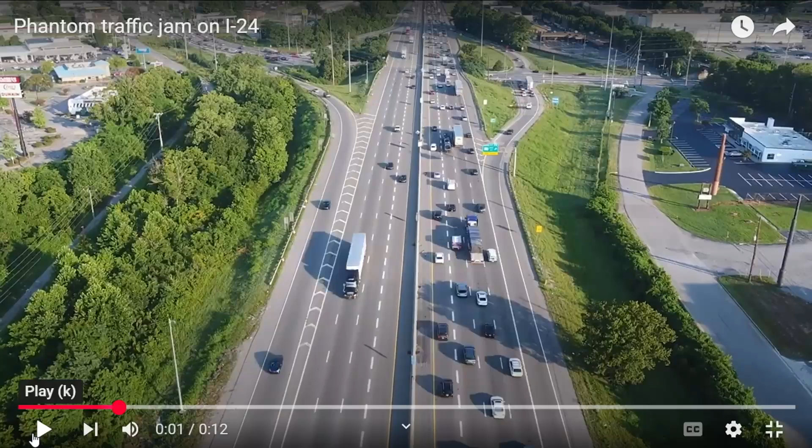It's a 1, 2, 3, 4 lane expressway or motorway. That's an off ramp. The traffic goes out from there. That's an on ramp. The traffic enters from there on the motorway section, right? And this is from YouTube, the I-24 expressway in the US. But it's a very good one to actually show you the congestion on the motorway section. So for example, if I look here, what observations can you see?

See, the traffic is getting congested, and the bottleneck, as you are saying, whenever there is merging happening at the on ramp, the bottleneck is there, and see the density variations. What else can you see from here? Imagine you are one of the drivers somewhere there. Maybe the speed limit is 100 kilometers per hour. You're driving at a speed of 100, and you're slightly distracted. You might be changing the music, or you're talking to your kid or whatever, right? You're distracted. You're driving at 100.

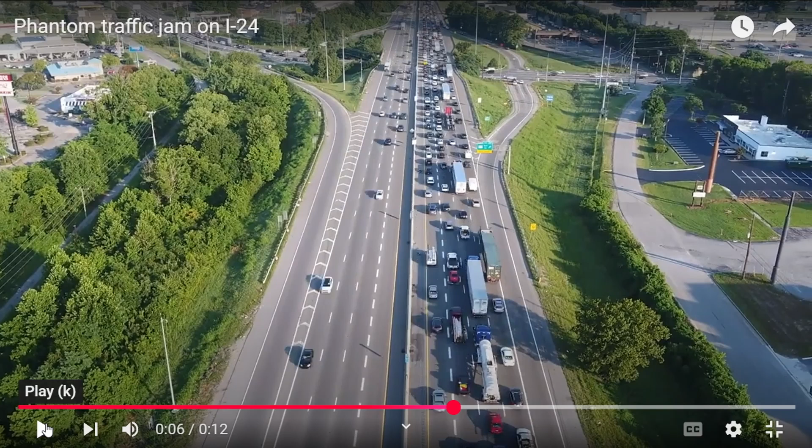What can happen if you're not fully attentive? You can easily have a rear end collision. One collision can lead to multiple collisions, right? It's unforgivable when you're driving at a very high speed. In 1 second, you can travel maybe 10-20 meters. You think 1 second is just 1 second, but you can travel very far. That can lead to an accident easily.

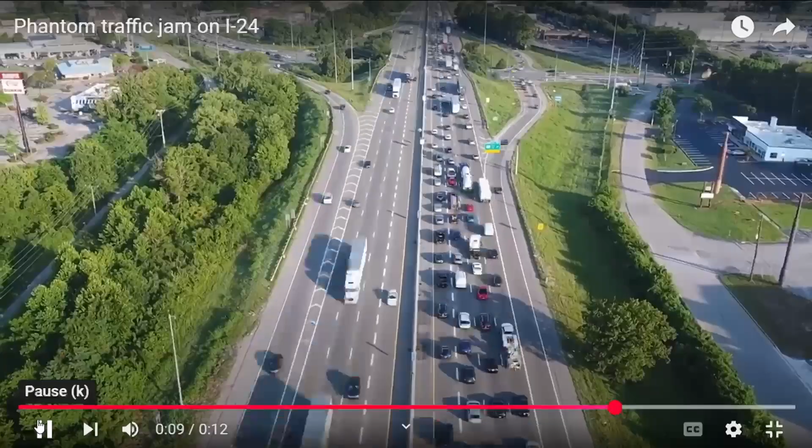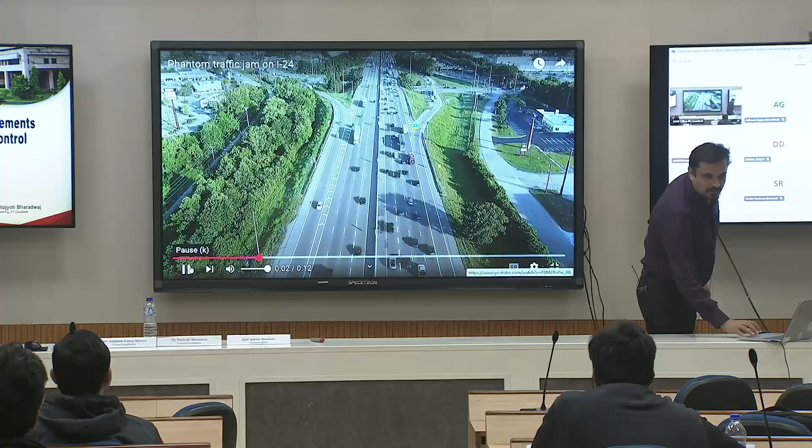So whenever you are having this kind of congestion happening, in this case there is a total stop and go condition, but even before the stop and go condition, when the traffic is getting congested, maybe now the traffic speed is 80 or 60, you are highly likely to have speed variations happening.

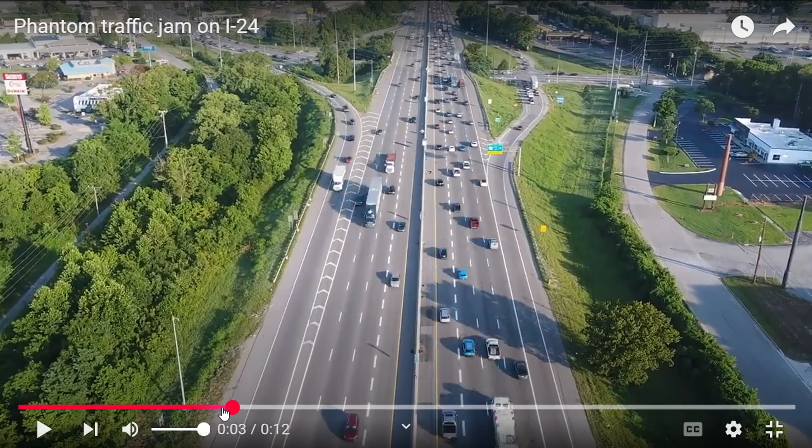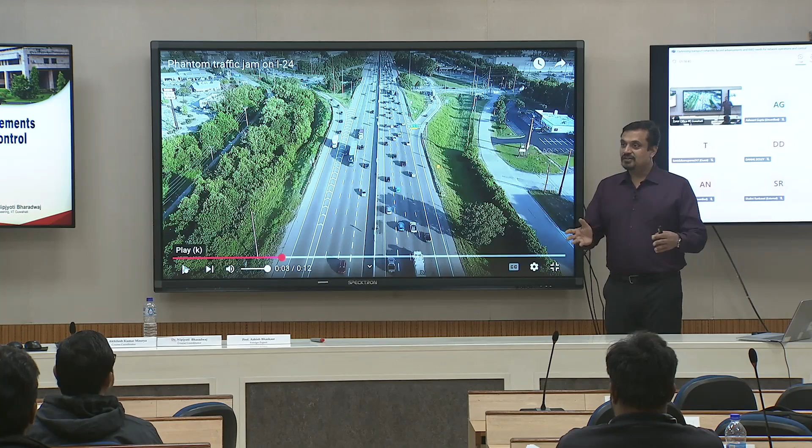Another thing that you can also notice from this kind of video is to check different lanes, how traffic in different lanes is moving. Some lanes are still fast compared to the other lanes, right? There is a lane by lane variation also happening. When you are trying to control the motorway sections, the expressway sections, you have to think about the ways or strategies by which you can minimize the risk of incidents on the network, and that's why you want to come up with some control.

You have 1, 2, 3, 4 lanes here, so they are almost twice a 2-lane arterial in terms of lane size, but arterials carry less traffic. These are carrying a much higher traffic volume. So there is actually a very high amount of demand flowing on it. So you have to basically give it some priority to let it flow properly, because if anything happens, you are stuck there. You can be stuck there for hours.

Imagine an incident happening here, and the next off ramp is maybe 2 kilometers away, and you are stuck at this point. There's no way you can take an off ramp. You are stuck on the motorway section. You cannot move out, and you might be stuck for hours. So you have to look at the ways by which you can really make it more efficient.

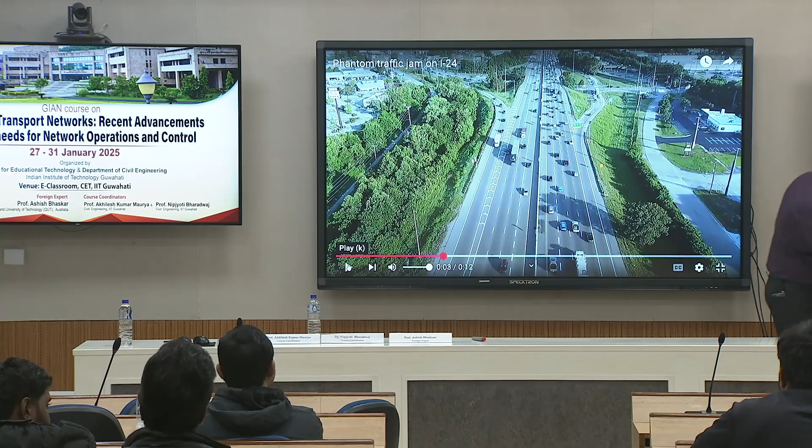So motorways carry a large volume of traffic, which you have already seen, right? The queues there can be really very long. A number of people will be impacted. It has its own environmental and economic impact. The speed differential, as we have already seen, is very high. You can have certain lanes with a high speed compared to the other lanes, which has a significant potential for severe accidents on the network.

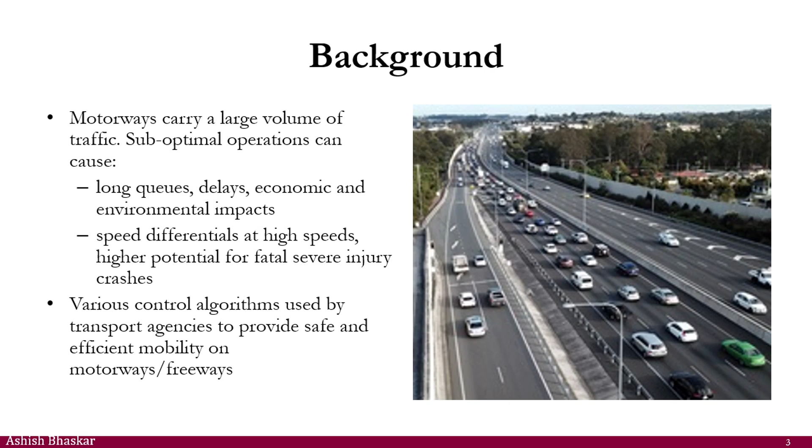Now there are various control algorithms developed by agencies to control the motorways, and one of the algorithms is ramp metering, meaning when you are entering the motorway from the on ramp, you can meter the vehicles. Don't let them just enter blindly. Just hold and go, hold and go.

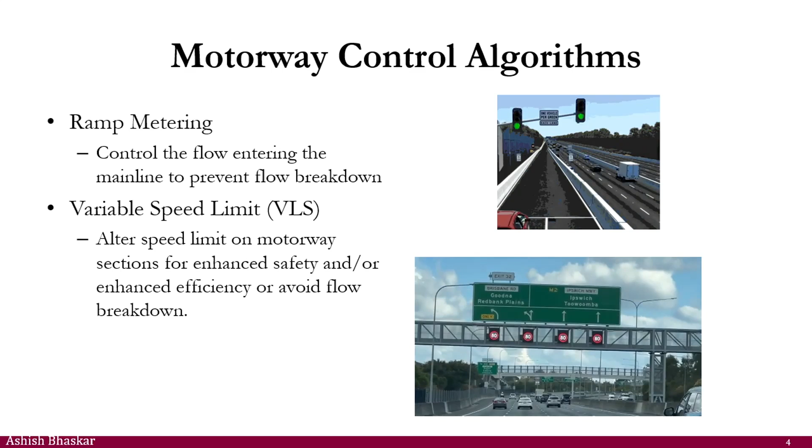That's one strategy that they can implement, or that's one actuator that they have in their hand by which they can control the movement on the motorway. Second one is the variable speed limit. You can change the speed limit of the section based on your requirement. So you alter the speed limit on motorway sections for enhanced safety and/or to enhance efficiency, but safety is the topmost priority here. These are the two ways by which you can control, and we are going to discuss these two ways.

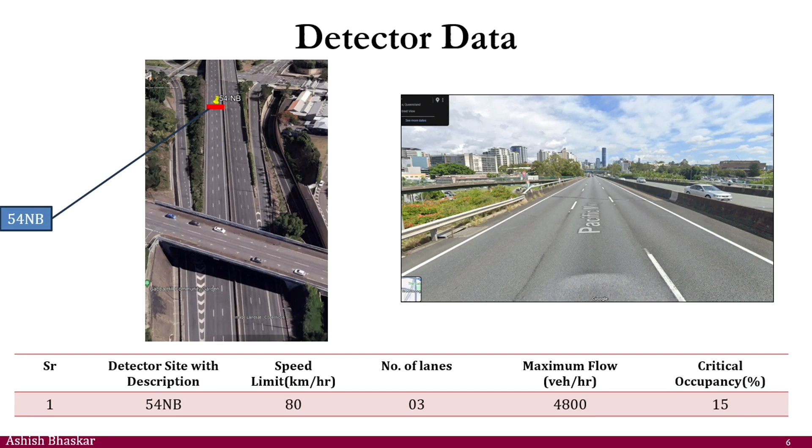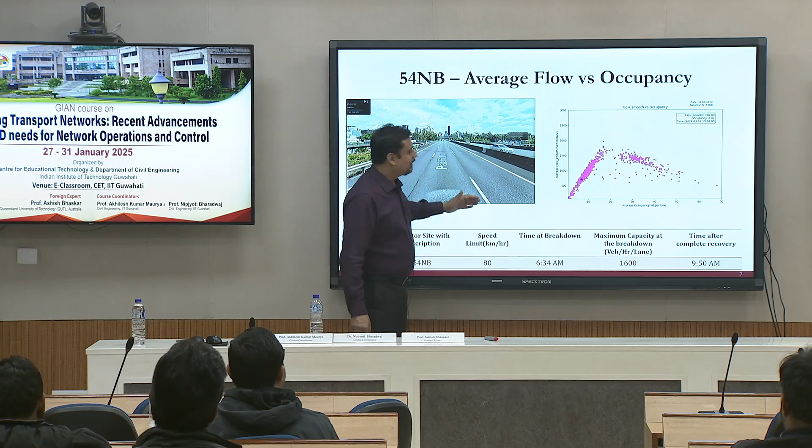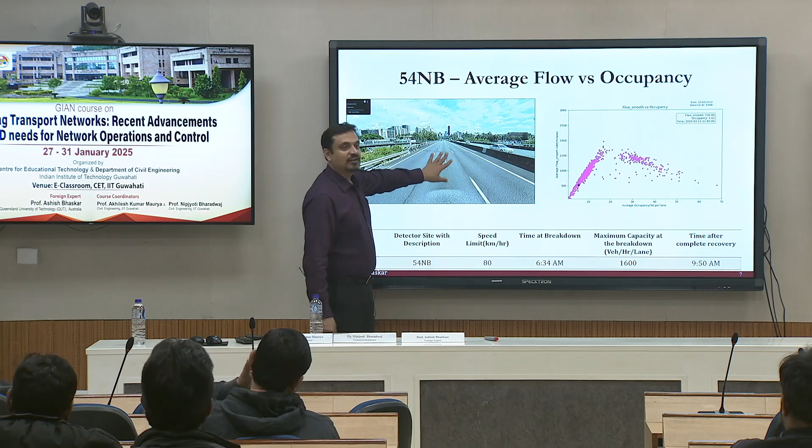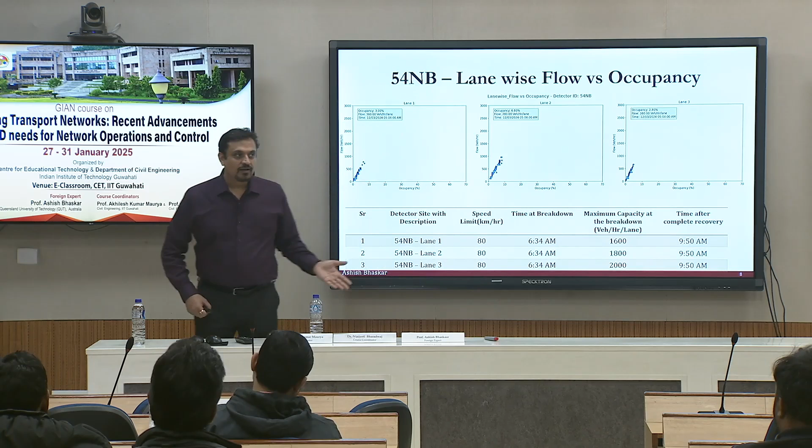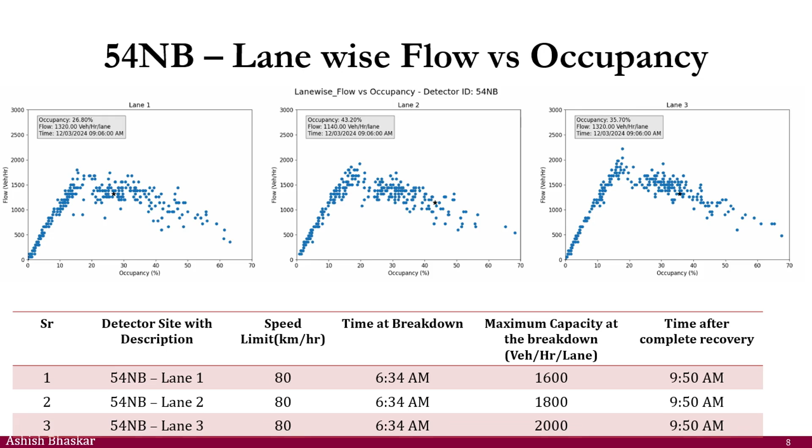I will come back to the hysteresis, but this is when you take an average. We have also seen individual lanes, lane 1, lane 2, lane 3. Australia has left-hand driving, same like India, not like the US where they have right-hand driving. So your lane 1 is the leftmost lane, this is the rightmost lane, and you can see the kind of plot you're observing. We have discussed that different lanes have slightly different capacity, in this particular case slightly different shape. And all of them have some level of hysteresis happening. So this is right now 9 a.m. in the morning and you are playing in this region.

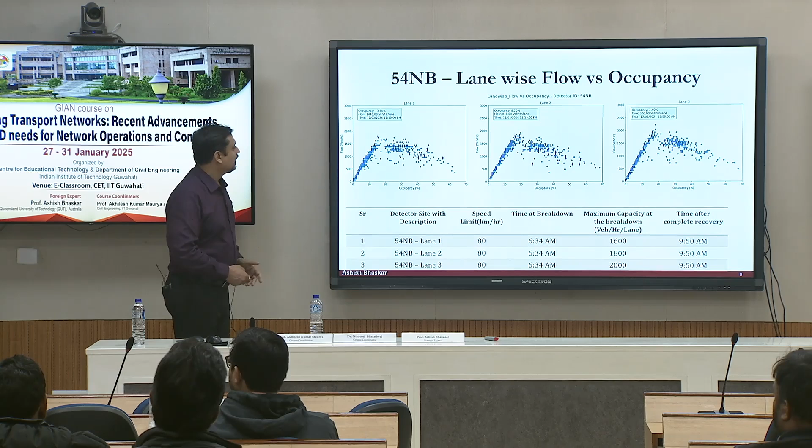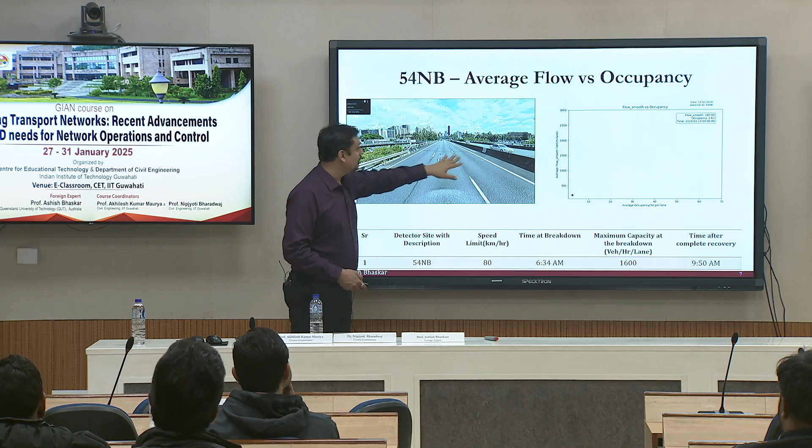Yeah? Sorry? Cut in the first lane, or that might be an off-ramp going perhaps somewhere. What do you mean by cut? Cut in the image you talked about previously? No, there's nothing on the first lane here. So all 3 lanes are like this. It can happen that there's an off-ramp, but in this particular section there's no off-ramp. It is just a section with 3 lanes, and you observe whatever we have shown here.

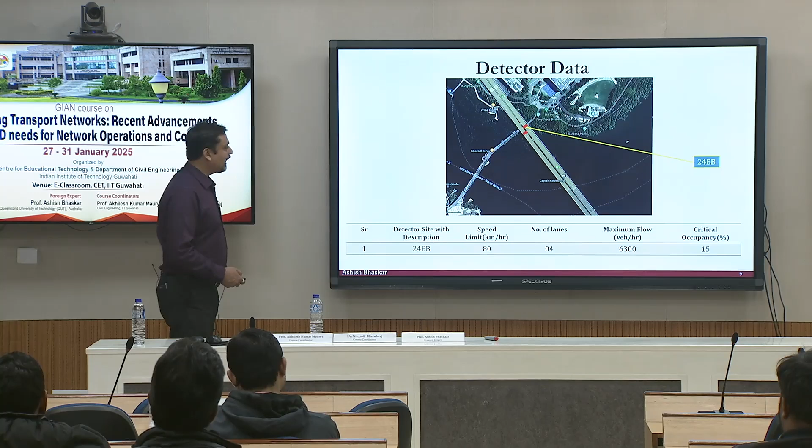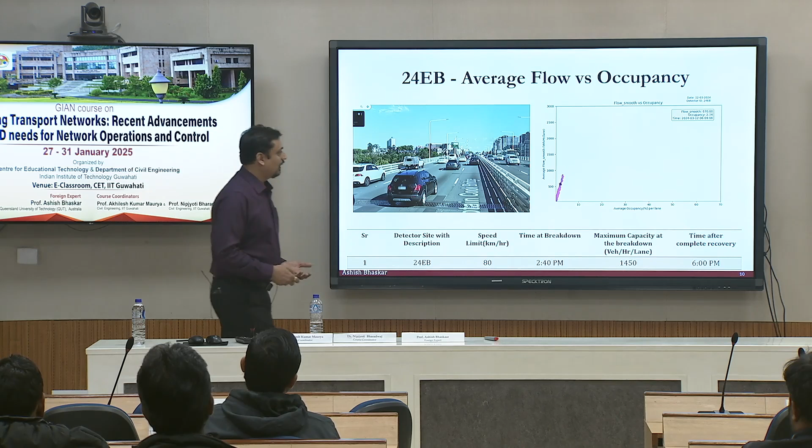Another section is on the bridge. We have 4 lanes: 1, 2, 3, 4. But the leftmost lane will exit the bridge, whereas the other ones won't. And this is the average that you get. So if you're driving on this portion of the bridge on the leftmost lane, you have to exit at the end of the bridge, so you will have slightly different behavior there. I will quickly speed forward this just for you to see how the shape looks.

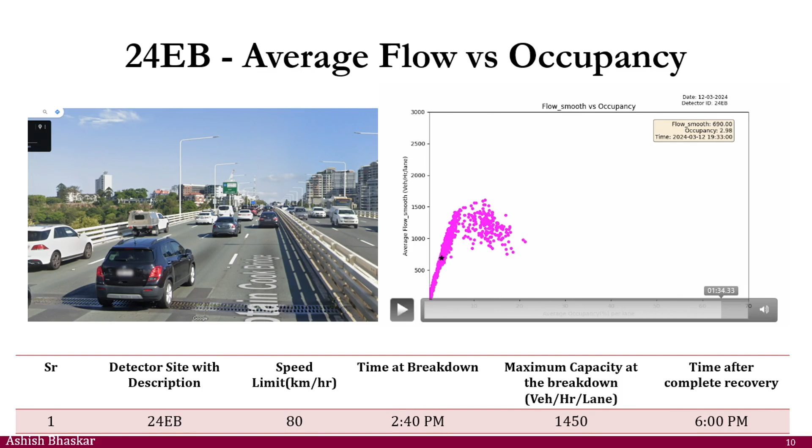So that's how the spread is happening on this one. Yeah, and if you look at the individual lanes, lane 1, lane 2, lane 3, lane 4, this one you can see is still in the lower one because most of the traffic is basically on that one. Unfortunately, lane 3 data was not available on that day. So as you can see, data are not always perfect. So you will have errors. If you try to generate the cumulative plot, you're not counting anything from that one.

And this is for one of the days, 12th of March 2024, quite a recent plot. And you can see the shape happening, right? So shapes will be different and different sections will be behaving differently. So in this particular case, I would say this is the worst lane compared to that one. So there is one lane which is behaving worse than the other one. And average performance will consider all the lanes.

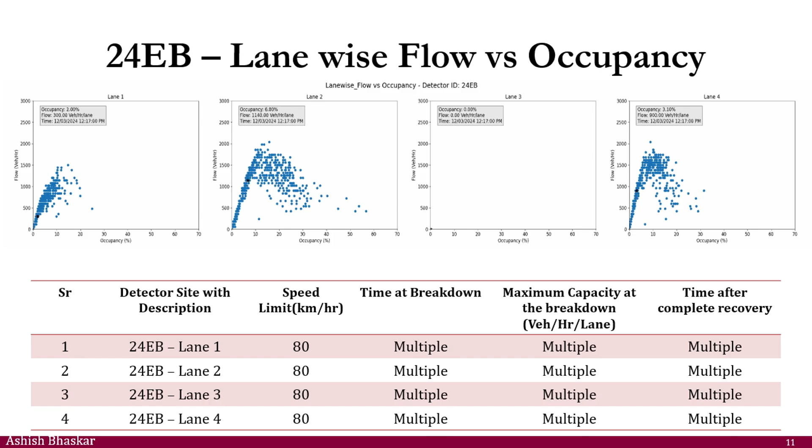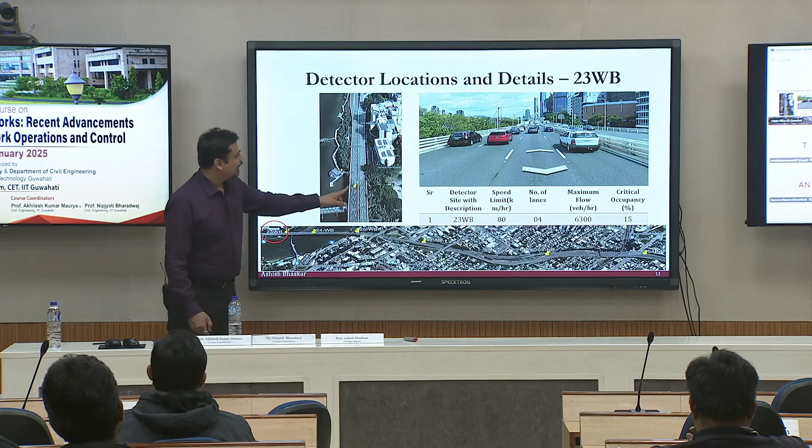Another section, we are now looking at 23. So now we are looking at a long stretch like this. So this is 23 westbound. Again, this is 4 lanes and it's still on the bridge. It is just going in the other direction of the motorway. This is, let's say, 25 westbound, further upstream. Then this is 54. So you have an off ramp just before that. So your loops are here, but before that there was an off ramp. You can see that that traffic has left.

And then if you go further up, in this particular case, you have no on ramp and off ramp, but you have a curvature. You can see the road is curving, and then again this one is having a curvature, and there is an off ramp. Or not, it's not an off ramp. This is basically an extra road going into the tunnel. So that's a toll road going along that.

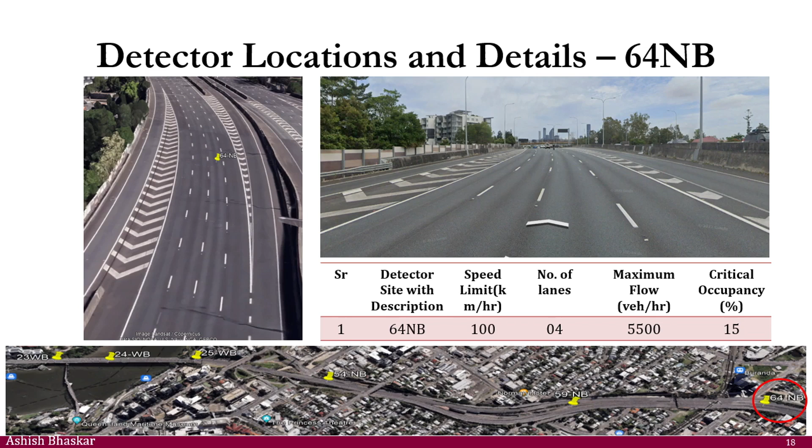But again, you have these 4 lanes, and this diagram is just presenting them in order. So the first one I think is 23, 24, and so on. So you can see 23, 24, 25. Oh, sorry, whatever the numbers were. So you can see the order. Downstream is here, upstream is there. So we are trying to present everything in one snapshot for you to see how the progression happens.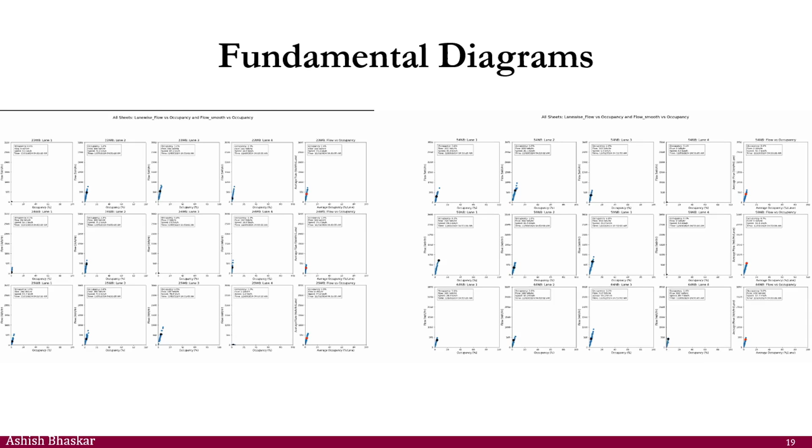So you can see that this loop was not working. Right now, none of them are congested. It's early in the morning sometime. This one is actually getting congested. And then the congestion spreads very quickly to upstream. So now you can see all the sections or all the locations in just one snapshot. So what inferences can you make from here? Like if maybe I bring it.

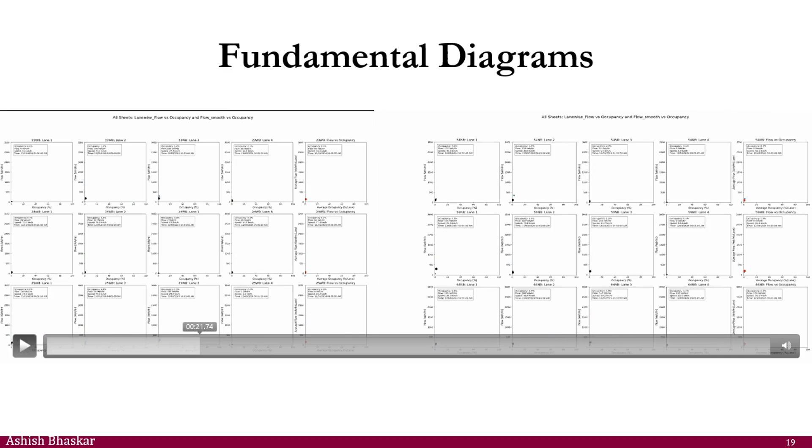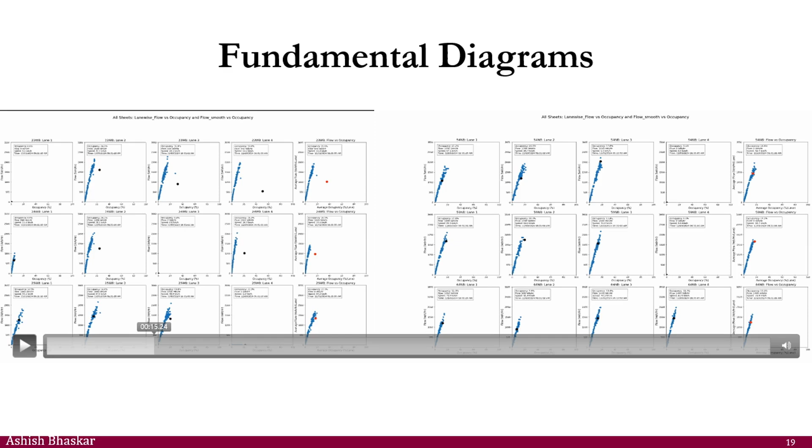How do I bring it? So at this time, there's no congestion. If I just keep on increasing, so you can see this one is now congested, going down. Others are not congested at this stage. Unfortunately, it's hard to see the time. What time? This is around 6 a.m. in the morning.

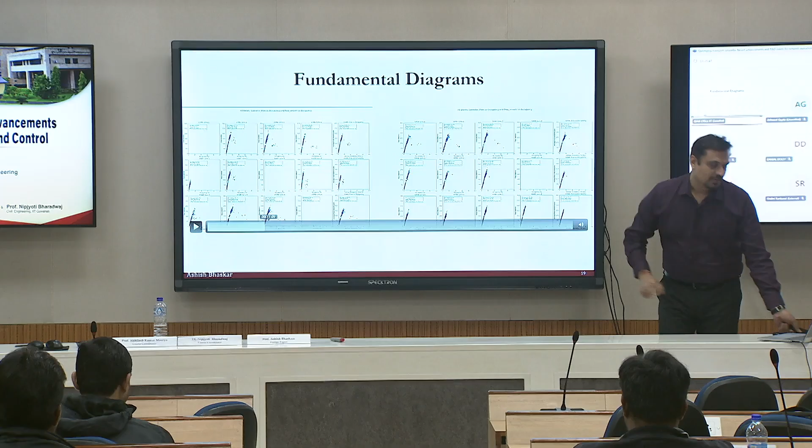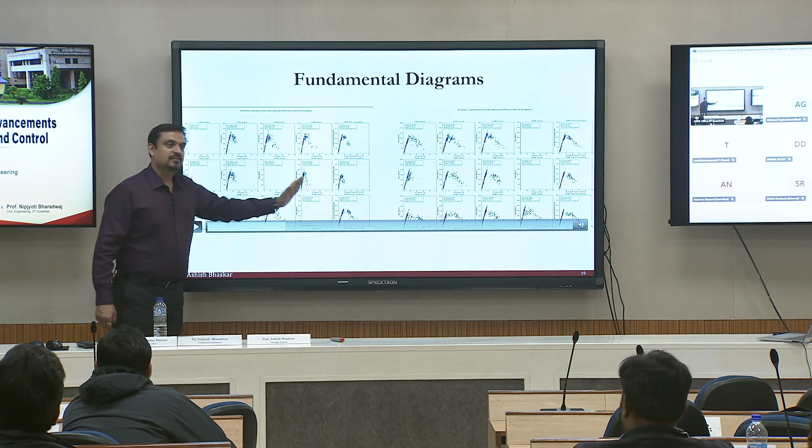So you can see there is more congestion happening here, but this one is still not congested. And then the congestion keeps on spreading up, and now all of them are congested. Whereas you can see, you might have some missing data, and you will have one of the worst lanes among the other ones, right? So based on this, if you have to make some decision, you will say, okay, I can focus on a decision based on the average among all the lanes, or I can focus my decision based on the worst among all the lanes. And generally, if you are taking a decision for the variable speed, you will go for the worst one, not the average one.

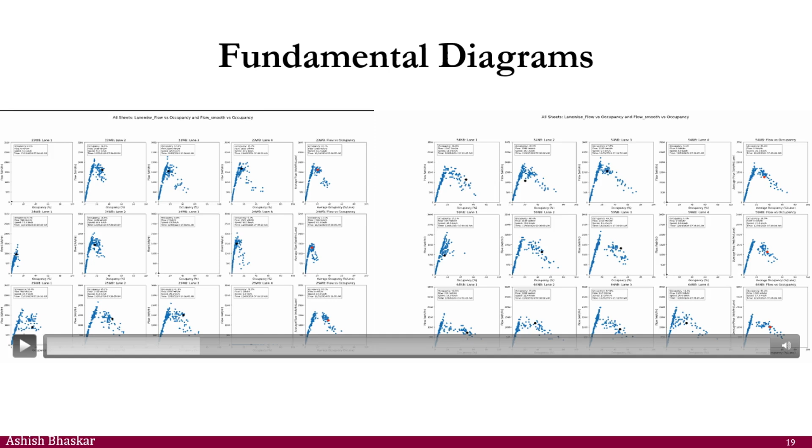With the worst, once the queue is formed on one, it will easily spread to other ones. But if the queue is formed, the speed variations are there, differentials are there, you have to take an action. So these real data sets give you enough data points in real time so that you can make some decisions in real time without having too much human intervention.

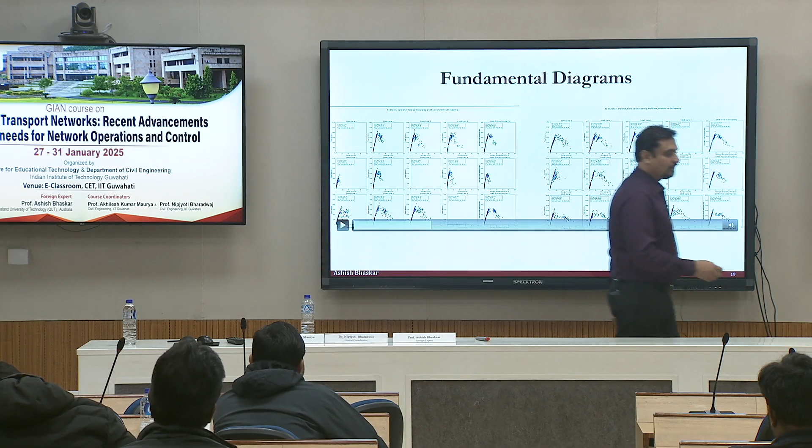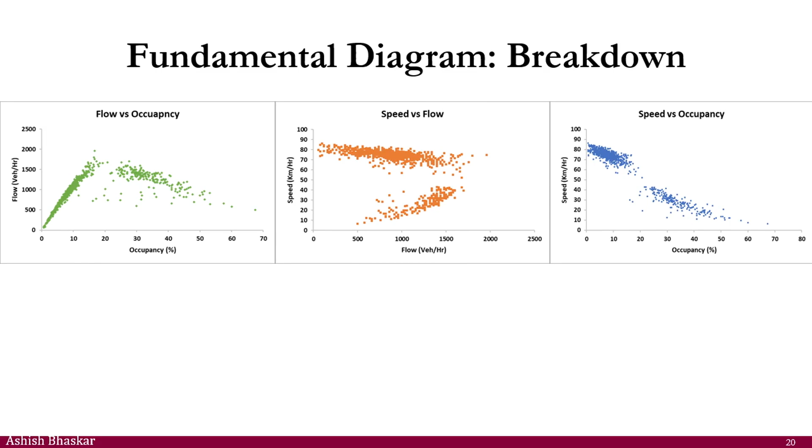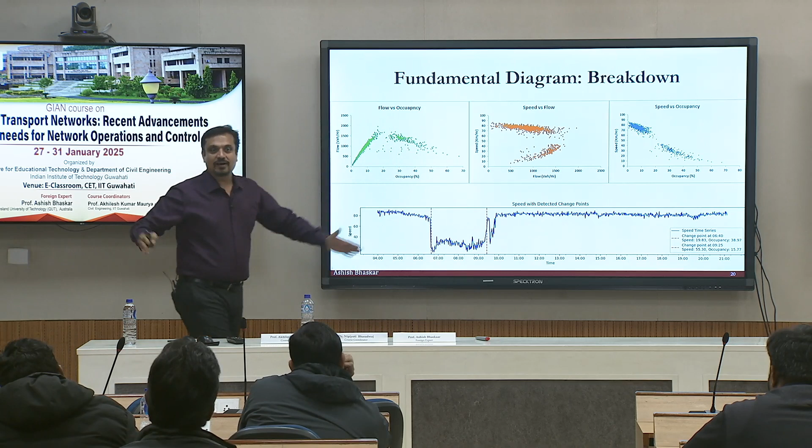There is a sudden drop in the speed happening, right? That's what we call a breakdown on the motorway. So when you have a sudden drop happening, it's a breakdown. There are different ways to identify the breakdown, and we want to avoid that. We want to delay the onset of this. We want to shift it more towards the right in time, and we want to squeeze it. We don't want to expand it, right? So breakdown here means the traffic has broken down, meaning the traffic has, from 80 or 90, gone down to 20. Things have really gone very, very quickly. That's a breakdown. Breakdown means that traffic is fully congested.

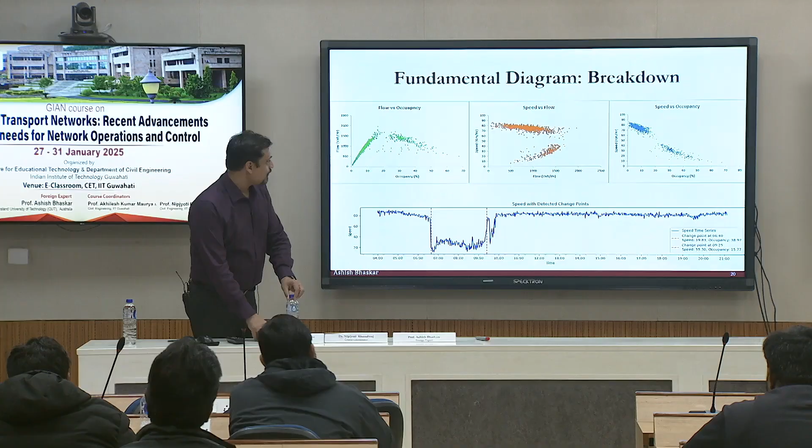But if you have seen that, when you are fluctuating, you are moving very close, and all of a sudden you go there. So you have to make some decision at this point only. So we are going to use this diagram to do the ramp metering. We are going to use this and this diagram for the variable speed limit.

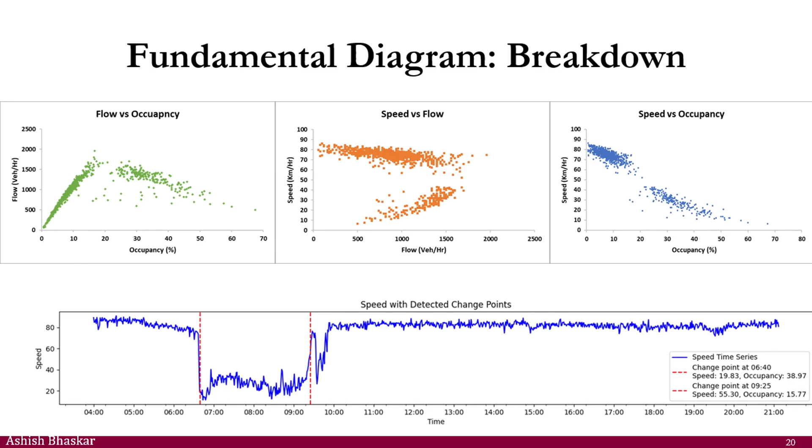I want to show you one of the impacts of incidents on the motorway. This is like on one of the days recently, 15th of July 2024. There were 2 incidents on the motorway, and I was stuck in the traffic for almost maybe 45 minutes to 1 hour. So I asked my team to just extract the data and show me how the traffic looks like for my teaching purpose.

But if you look back at the time, incident 1 occurred at 2:58 p.m., second occurred at 6:13 p.m. Start time is quite different. They are not primary and secondary incidents. They are 2 separate incidents, unfortunately, along the same corridor on the same day. This one here is around 4, that one cleared around 7. So 45 minutes was the delay.

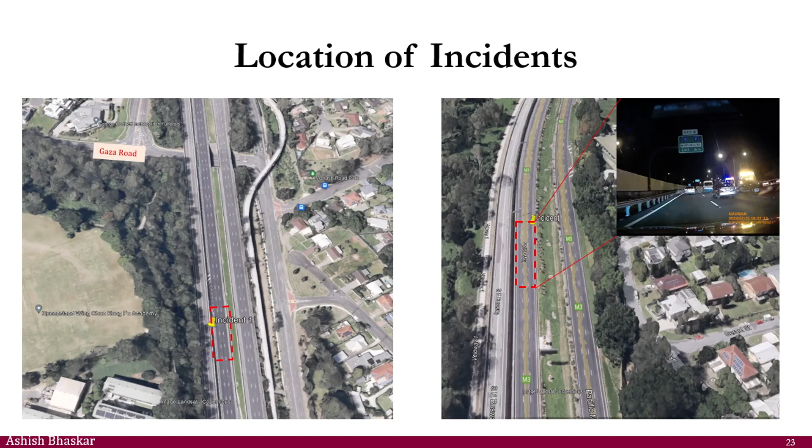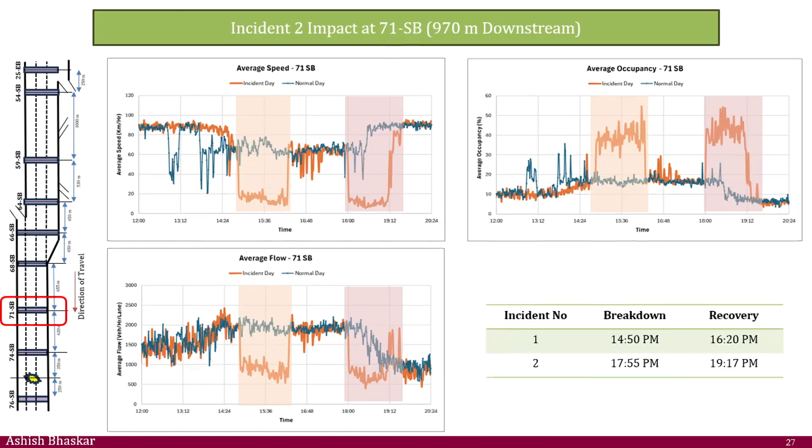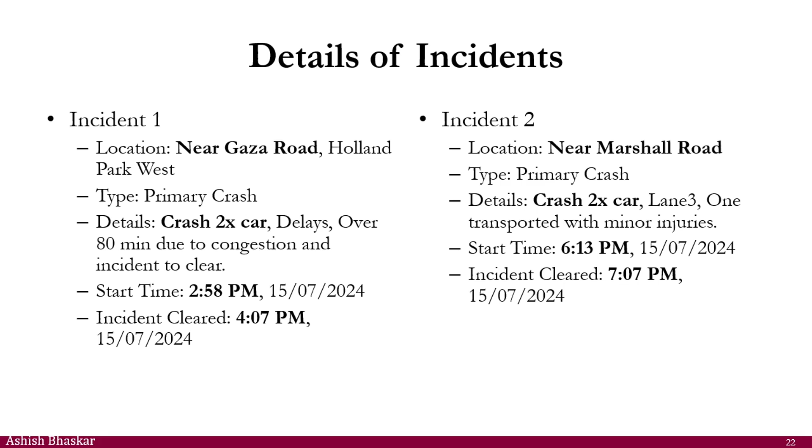Oh, this is the morning, it's okay, afternoon and the evening. Sorry, it was okay. What I said in the beginning was there were two incidents. Incident one happened at 2:58 p.m., around 3 p.m. Incident two happened at 6 p.m. So incident one should be the afternoon incident and the evening incident. But this incident cleared by 4. This incident cleared by 7.

So when I'm showing the plot to you, I'm showing it all the way from 12 to midnight. So this is because of the first incident, second incident. Let's call it first and second.

The reason I'm showing it to you is so you can get some feel of the values of the occupancy, get some feel of the values of the flow and speed when things are really congested. And these are really stop conditions because the speed is very low, around 5. The good thing was it was not full blockage. One or two lanes were blocked, but still the traffic was flowing further on. That's why you have some speed happening.

Then this is another one, and you can see the impact is so large. I like this, he has done a good job. He has tried to show the band, the width also, so you can see how it is moving from one time to another time.

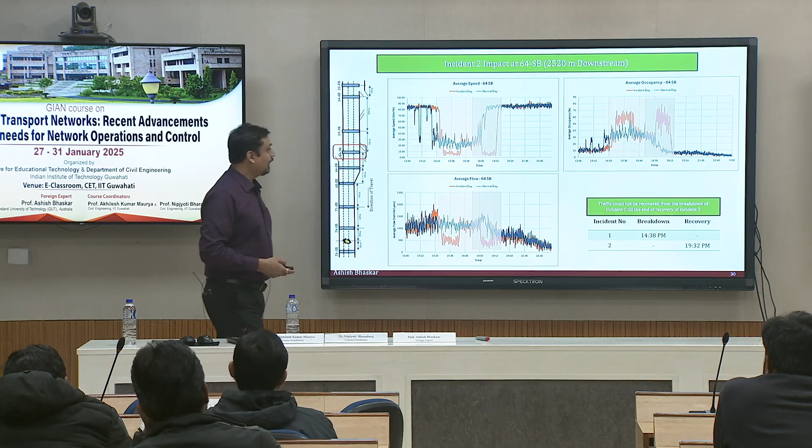Did the first incident affect the second one? Because of the first incident, occupancy would have gone up. Did it actually also affect the occupancy of the second? At this stage, no, because you can see that this has gone up. That's what you can see here. The incident was cleared, things are now back to normal, and then it has gone down.

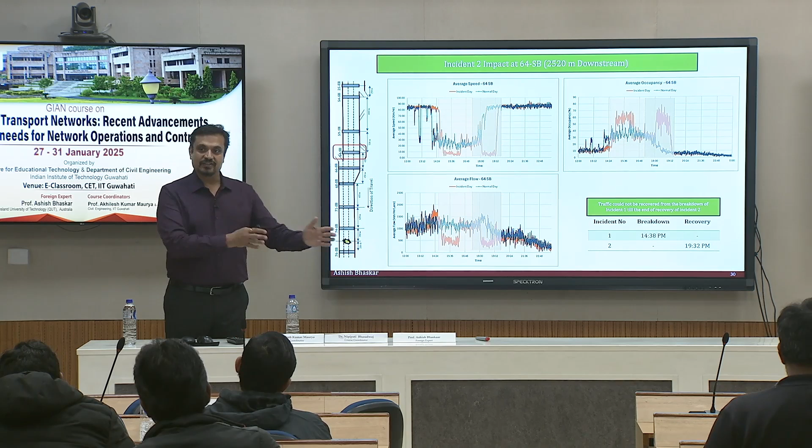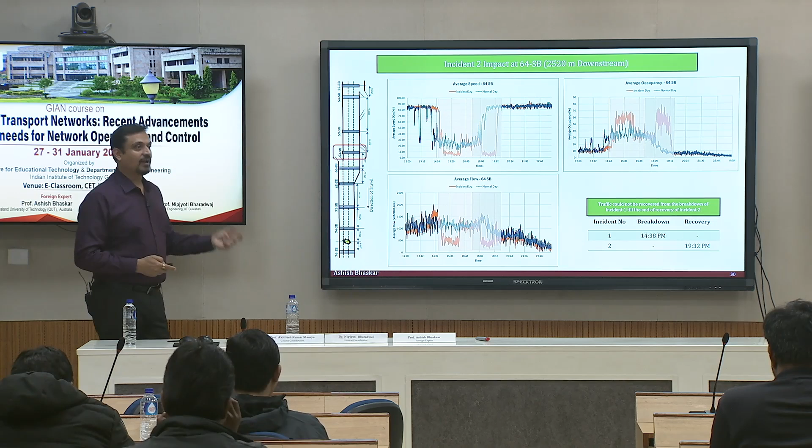So these are not related incidents, they are two independent incidents. When there are, we also call it secondary incidents. When an accident happens, traffic is getting congested, and somebody else has a second incident, the likelihood of secondary incident is much higher because now the congestion is growing. You can have multiple incidents on the road network if you do not take immediate actions. That's why whenever an incident is on the motorway or high volume road, you take immediate actions. You want to clear it as early as possible because that is going to lead to severe multiple incidents.

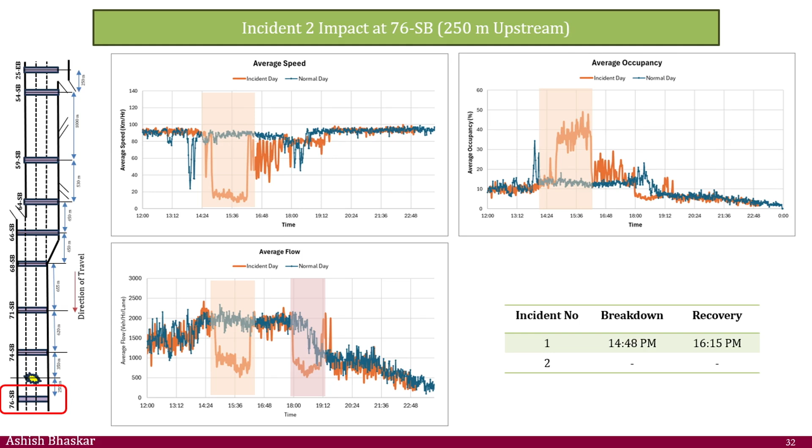And this is the last one. This is the one which is immediately upstream of the incident location. Speeds normally go very low, densities and occupancies go very high, and the flow will also drop in that case, obviously. Yeah, that's for the fundamental diagram.